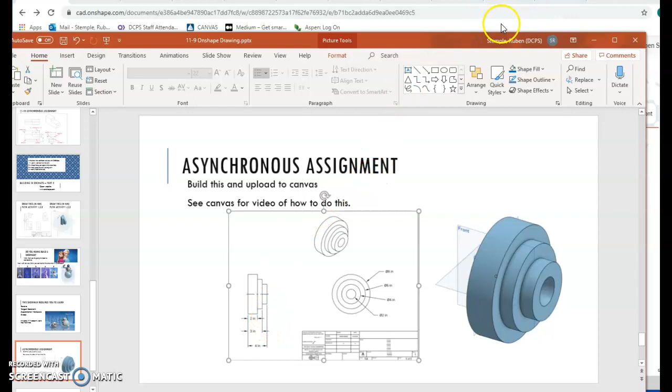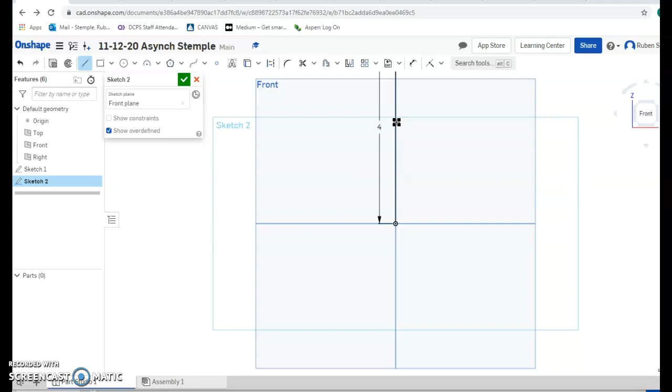Let me go back into Onshape and show you what I mean. I said a lot there, but it won't be too hard once you see it. I'm going to start my sketch with a line, stick it right at the origin - the cursor turns orange, sticks to the origin - and build it up 4 inches. I'll click the button and select that height to be 4 inches.

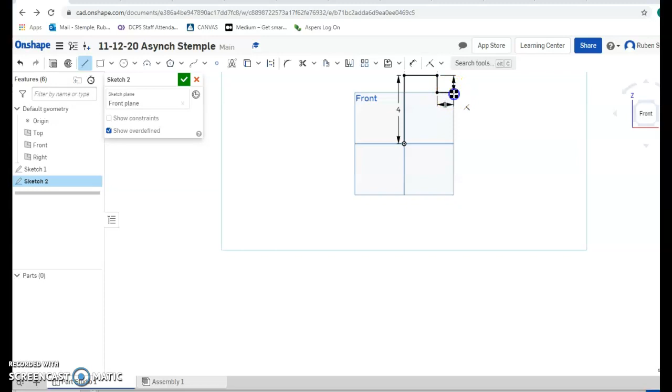That's 4 inches. Then this line at a 90-degree angle was 2 inches, so let me select that to be 2 inches. Then this was down 1 inch - make that 1 inch, select. And then from there it was over 1 inch. And then from there down another 1 inch.

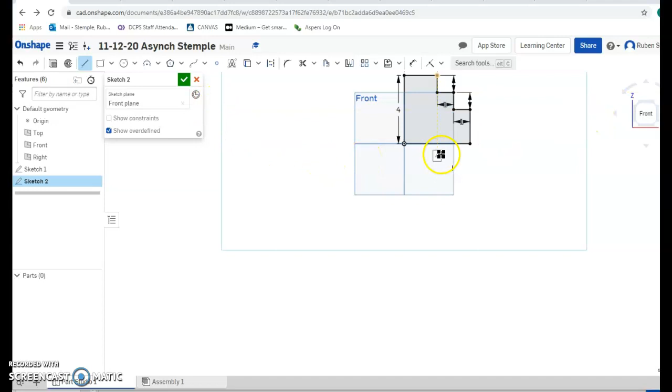I think there was one more - this way, 1 inch. And that means this one's got to come down 2 inches. I'm going to bring it all the way back. Now I've got that cross section drawn. I know I went through that fast - you should be able to reverse and rewind it: 4 inches up, 2 inches over, 1 inch, 1 inch, 1 inch, 1 inch, and then 2 inches down, connecting the whole piece.

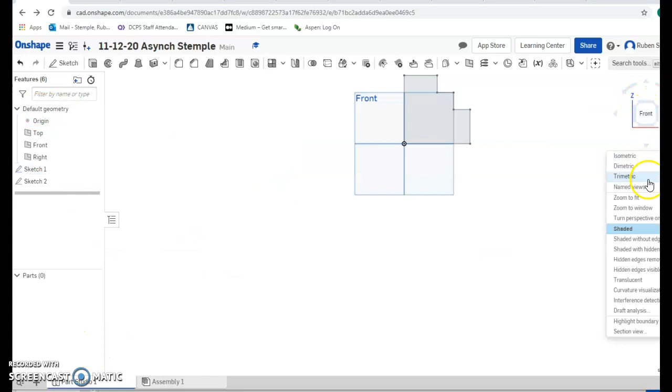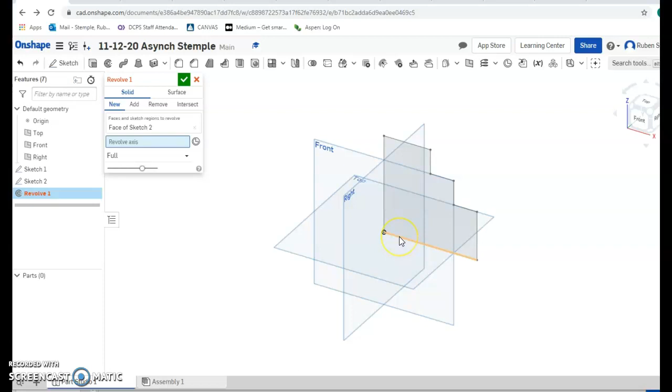Let me move this around so I can see it, bring it back to where it's visible. Now you can see I've got that sideways sketch there, that surface sketch. I'm going to revolve it now by pressing the Revolve tool, just like we did in class, revolving around this line as its axis. And there we have the whole revolution of the part. Perfect, so that's got the whole revolved part in there.

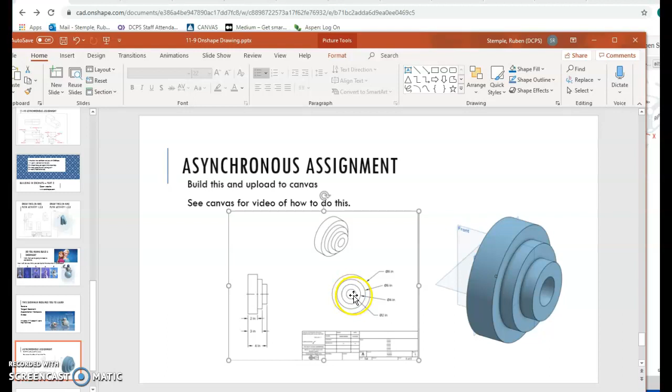Now I need to cut that hole in the middle. Back to my diagram - that hole in the middle had a diameter of 2 inches, and it was concentric, right in the middle there. So it's got a diameter of 2 inches.

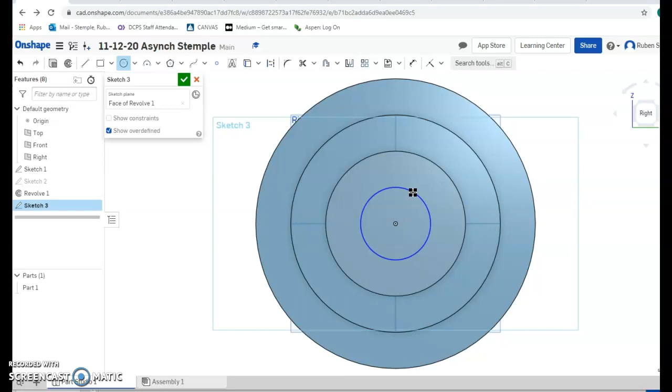Let me go back to Onshape and draw a hole, right here on this plane because I want it to go through the middle. Once again I'm going to move so I can see it directly on. I want to draw a circle starting at the origin with a diameter of 2 inches - I can get it close and then set it to be exactly 2 inches. Click that, and then I'm going to extrude it right here.

I'm going to extrude it to remove it, all the way - it should be 4 inches back. And there you go, that should cut the hole right in there.

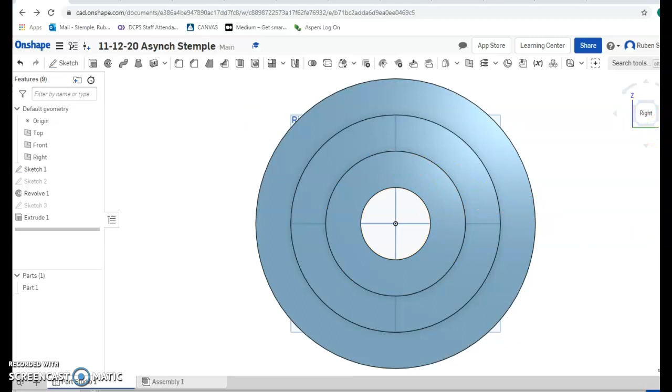Now there are a couple different ways to do this. This, I think, is the easiest way based on the diagram I gave you. Hopefully you can see how that works and you can make that happen. If you have questions, go back and watch the video again, and bring them up to me in class and I'll do my best to help. That's your asynchronous assignment for 11/12/20.